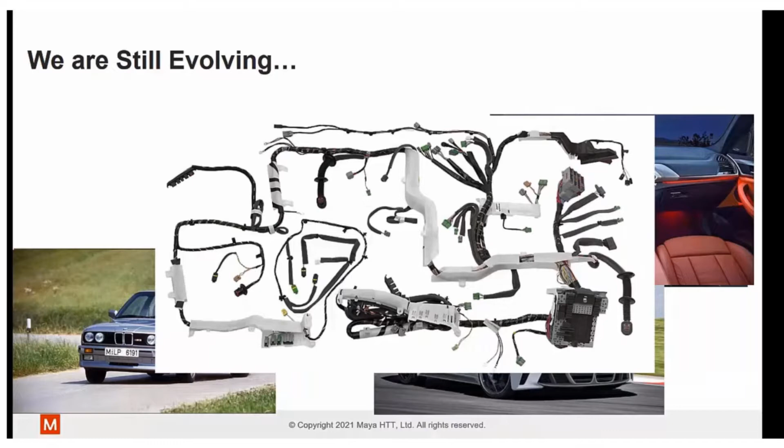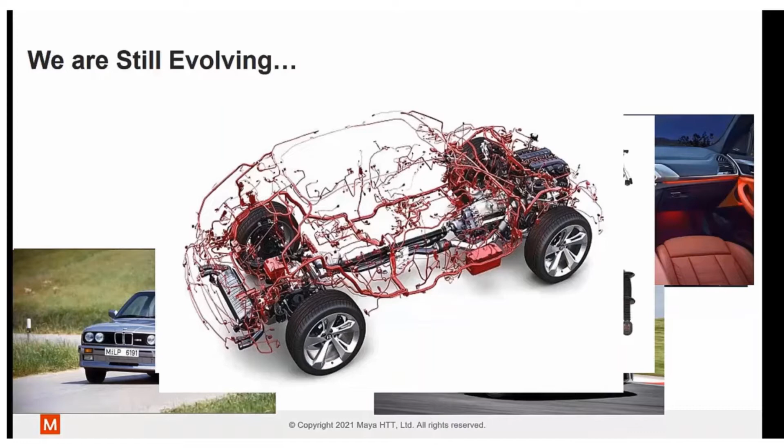Unfortunately, this evolution is a side effect of a common industry trend: electrical content is always increasing, regardless of the industry or application. This increases the cost to do the initial design as well as to manufacture the harness, for example for the prototype, and increases overall design time due to complexity. Every time something new is added to the design, the chance of inducing an error becomes greater, along with changes that you might have to make to the design.

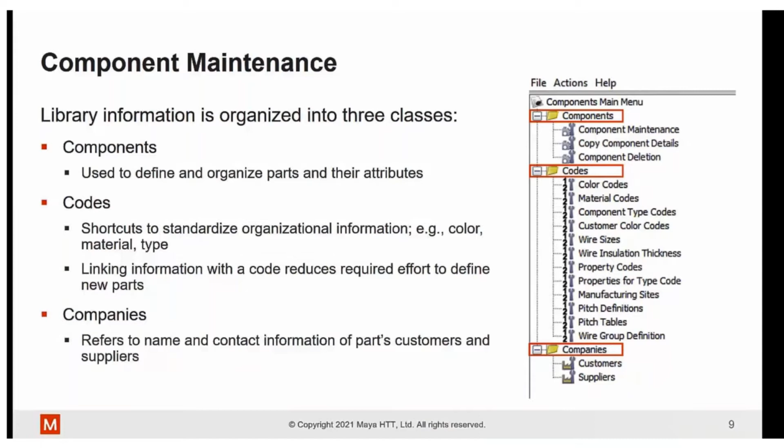Another important part of the Solid Edge wiring and harness database is that it enables users to establish component links, which allows users to streamline time during their design. From our experience, most engineers use non-dedicated tools for electromechanical design, such as Excel or Visio, which don't offer intelligence and are more or less just drawing tools. What sets Solid Edge apart is that it's not just a drawing tool—it's a digital twin of your design, and the digital thread extends all the way from your component database to your design.

For example, let me explain this: you create your own devices, a list of devices in your database. Within those devices, you can associate a group of connectors that are always preferred to be used with a specific device, and each connector could have a group of terminals, seals, and plugs always used with it—these are called cavity components. Each cavity component is assigned to a group of wires. So instead of building each component and device and then selecting connector, terminal, and so on individually, you just select the device, and Solid Edge will automatically fetch all that information from the database into your design. Let's see how that's done in the tool itself.

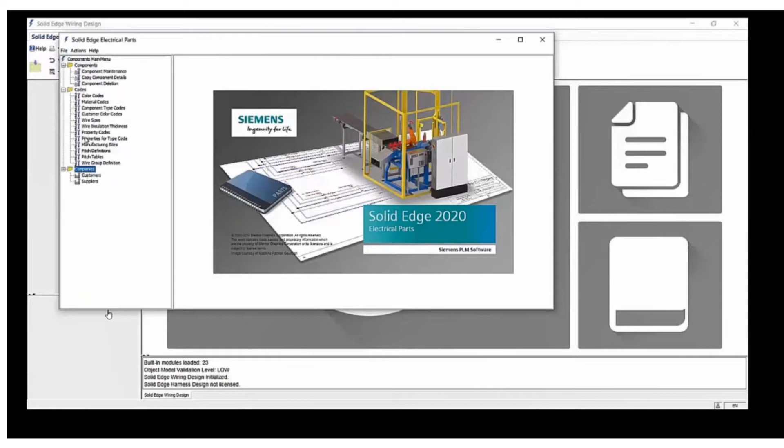The codes are where you define your standards. Once you launch the component maintenance dialog from the components group, we're going to add a new component. We're going to select it to belong to the group connector, and assign a part number for this specific connector. Then we're going to use the user interface to add a description.

So it's just going to be a 5-pin connector. We're going to set the number of pins to 5, and specify using the codes that we defined, the type code, the color code, the material code, which allows you to sort your components and create subcomponents or subgroups within the group itself. So for a connector, you can have multiple types.

Solid Edge also allows you to add the housing components, for example, in a connector, this is where we're going to define our terminals. So here we're assigning a specific terminal to be used with the connector that we just created. It automatically searches the database, and we can search by part number. Once we finalize and set all of the settings for that specific terminal, we apply it, and you can see that it's now listed in the housing page.

Now we're going to do the same thing, but create a device. We established the link between a connector and a terminal; now we're going to establish the link between a device and a connector. So we created a device, assigned a part number, assigned a description for the device, and again leveraged the codes to define the type code, color code, material code, and the number of pins for this specific device.

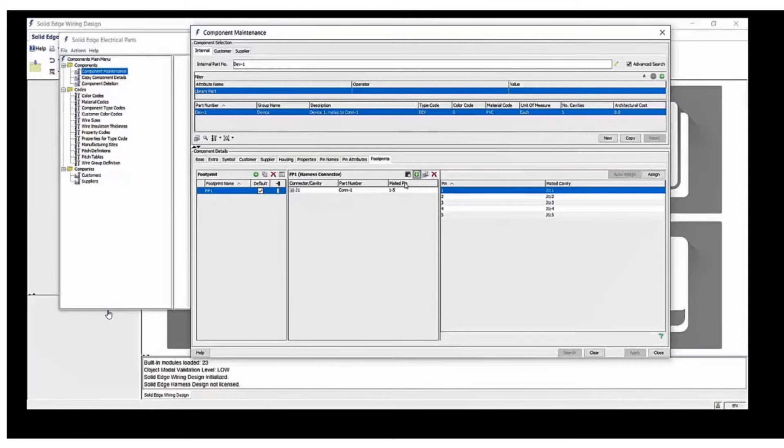Let's take a look at the definitions of the device we just created, or essentially the connector we just assigned. Once we open the definition of that specific connector, you'll notice that in the housing tab, we have our terminal that we just assigned. This is a very smart way to establish links between your components and streamline this in the design. Once you do it once in the library, it's going to save you time in the design itself, since you don't have to manually add those components.

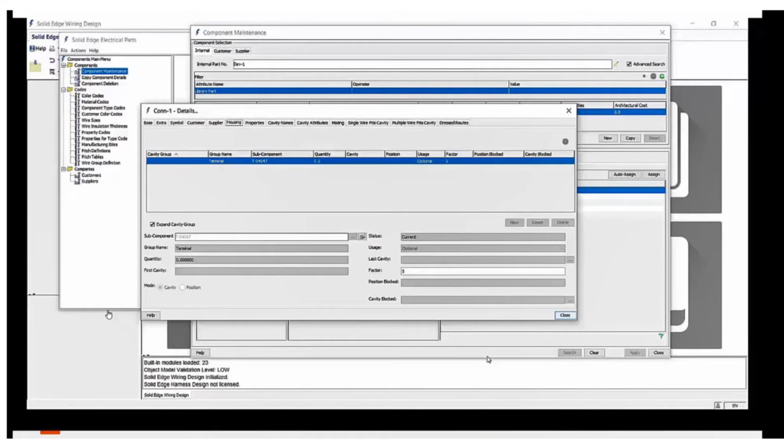So next up, we're going to discuss the design verification. Once you have your first design, you'd like to move into the next stage: verify the design and make sure that everything is operating as intended.

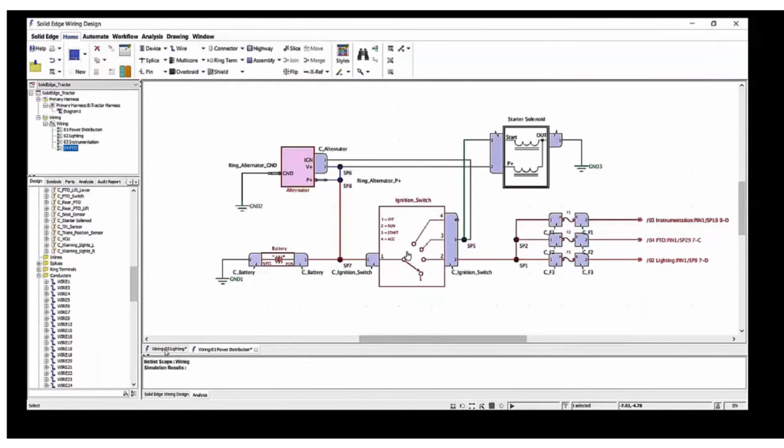Now what we're doing here is activating the analysis mode, and we have two modes of analysis that we'll explain as we progress. We're going to select the qualitative one, which gives us an idea of what's happening, and we can immediately see the diagram moving into a cyan color, indicating there's no current flow. We can select multiple positions for the select switch, and now we can see portions moving into green, telling us there's a current flow in those specific wires. We can simulate faults, and also hover over a connector and select the different positions.

We can go back and see in the main, we can see the power coming from the battery going into the solenoid, but we can see that the light is not going. There's no current to the lighting.

So we can select multiple switches, and now we can see the power is diverted in the instrumentation panel and so on. So we're just testing the different settings, the different positions for the ignition switch, just to understand how it operates.

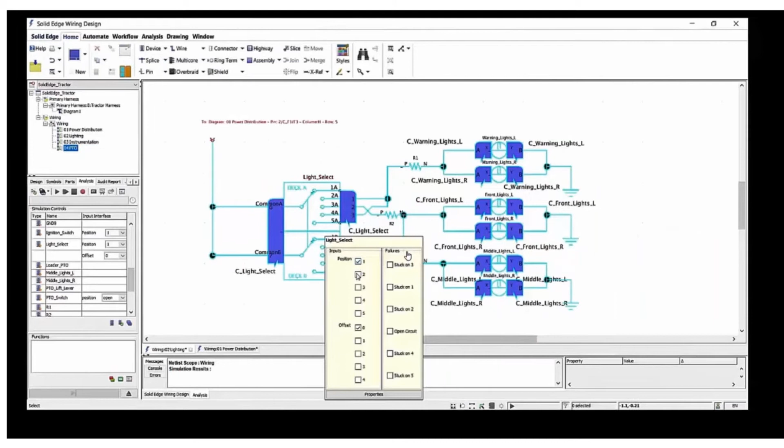And from there, we can go back to the lighting system and select another position for the light select switch. And now we can see the current is flowing. So this gives us an idea of what's happening.

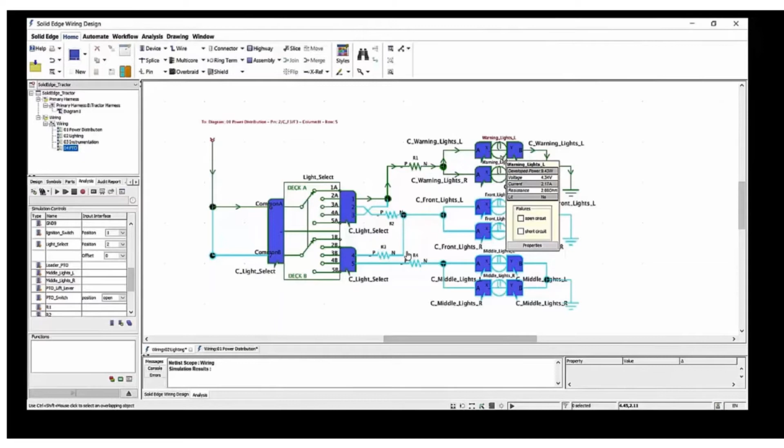Now we're going to move into a more detailed analysis type, which is called the numerical analysis. This allows us to get more information like the current flow in the wires, the rated current of the wire, the voltage drop in the wire, the resistance of the wire, the temperature of the wire. All this information is available from the definitions that you have in the library database. So Solid Edge wiring and harness utilizes this data to show you quickly what's happening.

And we can also simulate things like short circuit and failures in our systems. Just as you hover over the specific component that you'd like to know more information about, it gives you a list of such information.

Again, here we go back to the main challenge of the electromechanical design in the industry, which is ECAD and MCAD collaboration. The nature of the engineering process is a multidisciplinary process where multiple engineers and technicians are working on the design, and therefore being able to exchange the data between all teams involved is of the utmost importance for a better, quicker, and less risky design.

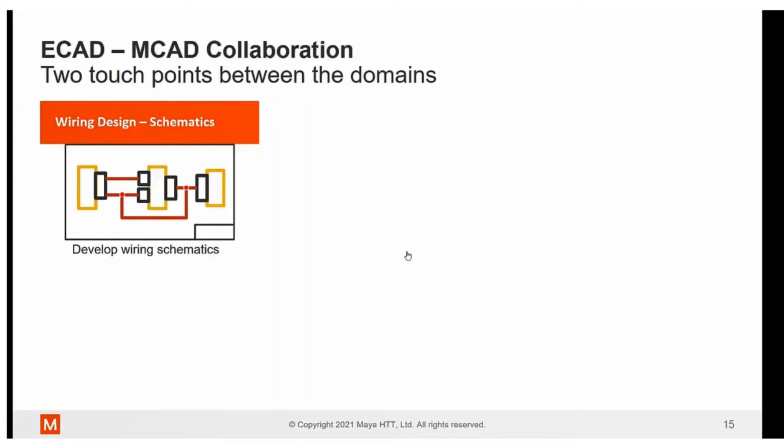So the ECAD and MCAD collaboration, when we break it down into three main sections: we have the wiring design, where you develop your schematics, usually done by the electrical team or electrical engineers. Then we move into the actual 3D CAD electrical routing or 3D CAD modeling, which depicts the actual physical length of the model, whether you're designing an electric vehicle or even a coffee machine. You have to have some physical representation of that specific device.

And again, the harness design, which is called a nail board, to actually manufacture the schematics that you just developed for those components. So let's see how Solid Edge wiring and harness and the different IES portfolio, the integrated electrical system portfolio, address such challenges of ECAD and MCAD.

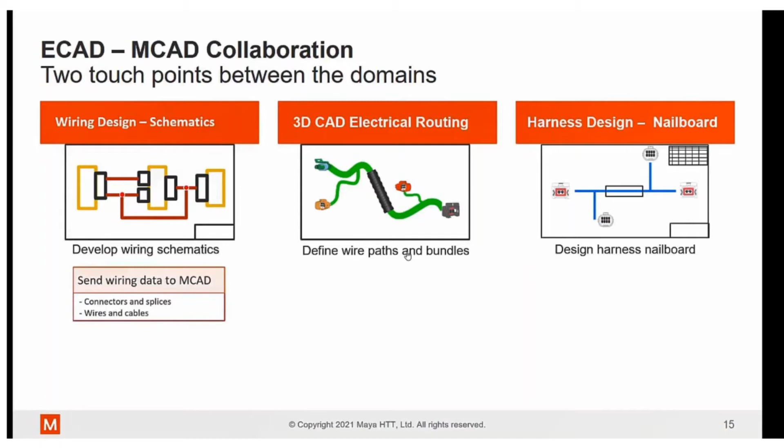The first step, we're going to use the wiring design to send the wiring components, for example, the schematics, into the 3D world. Then the mechanical team usually imports this data to calculate the wire length, to calculate the actual distances between and the positioning of those different components in the actual physical diagram or the actual physical model.

And that data is sent back to the electrical team to use those wire lengths to calculate voltage drops if the device, if the application, is sensitive to voltage drops, for example. So this process is repetitive until you finalize the design and reach the point where you have confidence in and achieve exactly what you're looking for in terms of your design.

So let's take a look at how that looks like. In this case, we have an integration between VeSys, which is a tool in the IES portfolio, and Solid Edge and NX. Solid Edge wiring and harness has the same integration with Solid Edge, the CAD model, of course.

So what we're doing here, essentially, on the left we have the schematics, and on the right-hand side we have our harness. As you can see, the physical representation. We quickly import the information into NX.

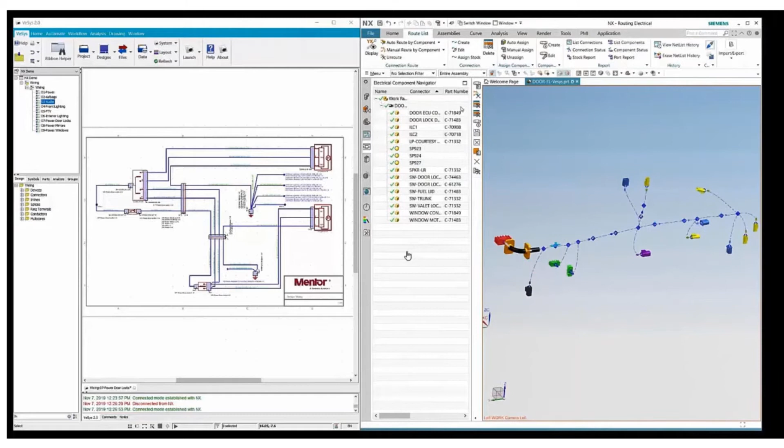And from there, we're going to assign the components. The components that are known and identified are assigned automatically. Components that have the same part number, we need to assign them manually. For example, splices — we're using the same type of splice for this specific application. That's why the manual assignment. But you can see the connections are identified automatically.

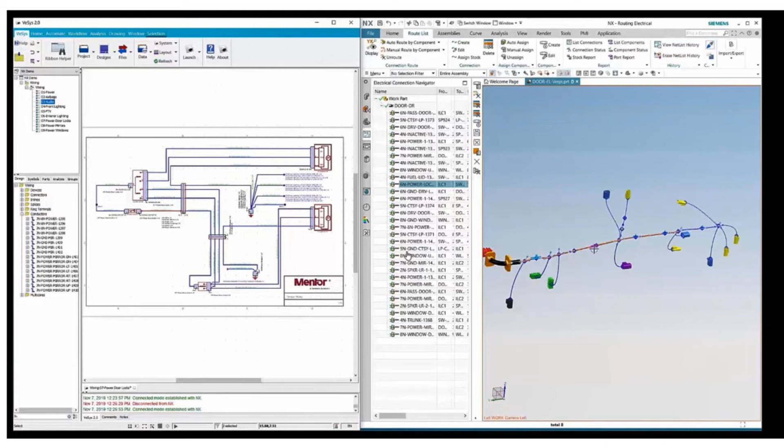And a very powerful feature is that it allows us to cross-select. So as the electrical engineers and the mechanical engineers are selecting different components, it highlights on each other's screen. So the mechanical team can select a component and it highlights in the electrical, in VeSys, for example, in this application, and you can see how it cross-highlights automatically in the other screen as well.

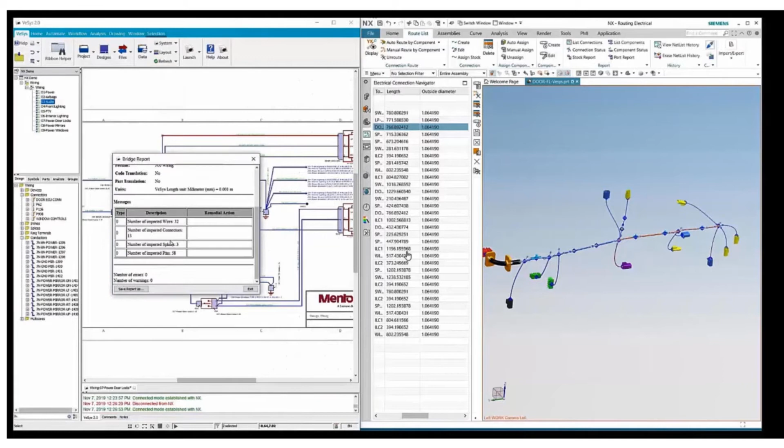Another thing is exchanging wire length. We can see that this wire has no length, but if we select the same wire in the actual representation, we can see the wire length. So we're going to exchange the data between the two softwares, and with a click of a button, now we have the wire length information inside the tool, which allows us to do a detailed analysis and calculate the voltage drops. The final step after that is to send the finalized CAD model to produce the harness, or the actual nail board or form board, depending on how you'd like to name it.

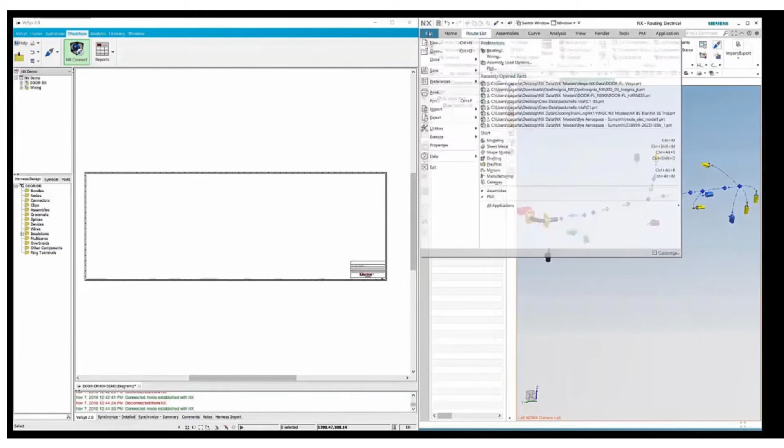So again, let's see how that looks. We have our components in NX with the components assigned and defined, and we're going to establish the connection mode between the two. As you can see, we don't have any connections yet because this information we're going to bring into the electrical tool. We're going to make sure it's using the correct format to interface, which is PLM XML. Once the mode is established, we're going to import the harness.

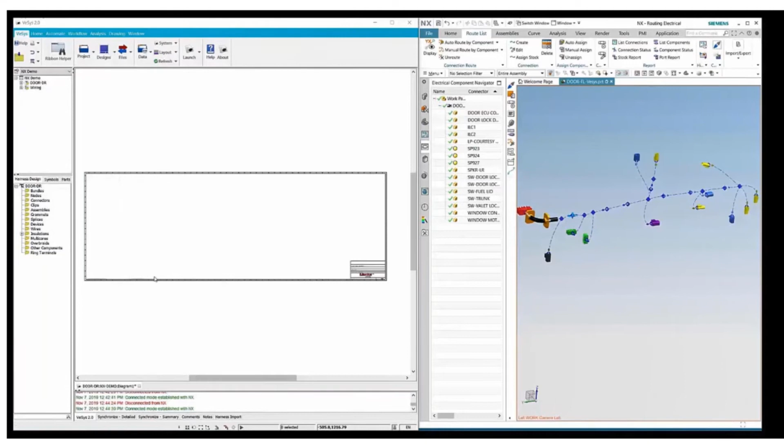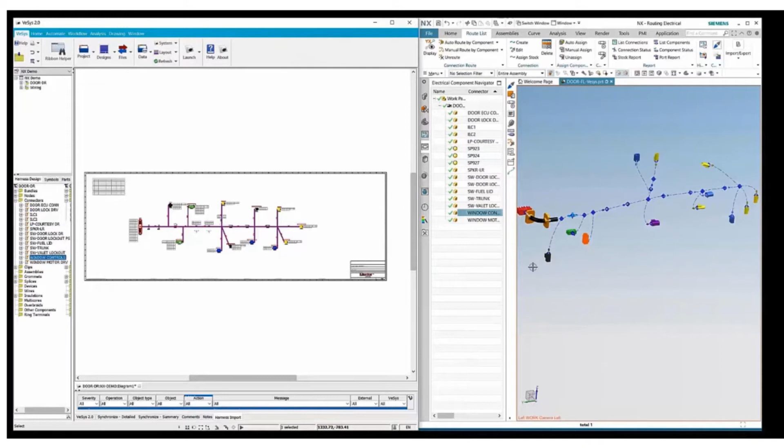The tool immediately asks you for the type of flattening required. In this case, we're going to use 2D flattening, just selecting that. And it's done—we have our harness imported automatically into the tool. Cross selection is available; once we select, it highlights in both screens. This is a very powerful tool. It saves time in the design and even in exchanging data between different tools or different teams in the design itself.

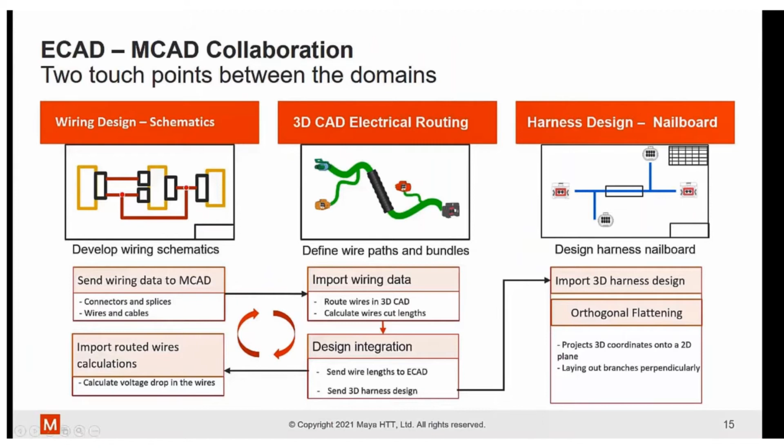Now we've looked at the ECAD-MCAD. Now let's look at the automation functionalities available in Solid Edge wiring and harness.

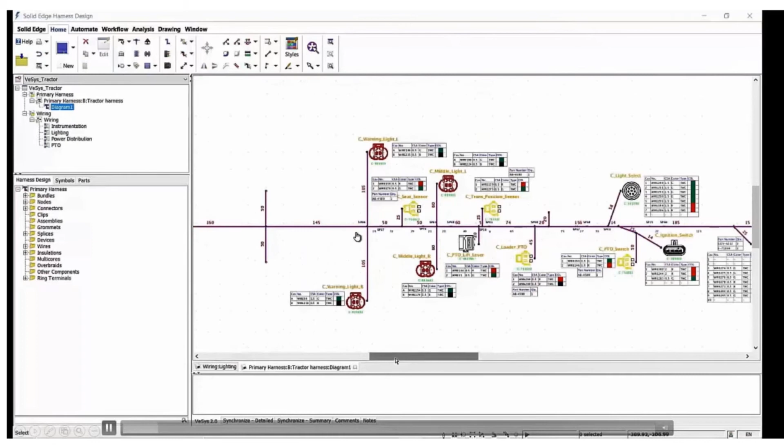In this case, we're going to make sure we add more components to our wiring design. Here at the bottom, this is our harness, and as you can see, it's partially completed—it's missing a few components which we added in the wiring. Now we just need to assign them to this harness and synchronize the information so we can bring everything over from the wiring to the harness.

So going back to the wiring design, we're going to make sure that the components here at the lower part of the diagram have a specific description, which is the name of the harness we're designing—the primary harness in this case. We're just going to make sure all the components have that specific property set.

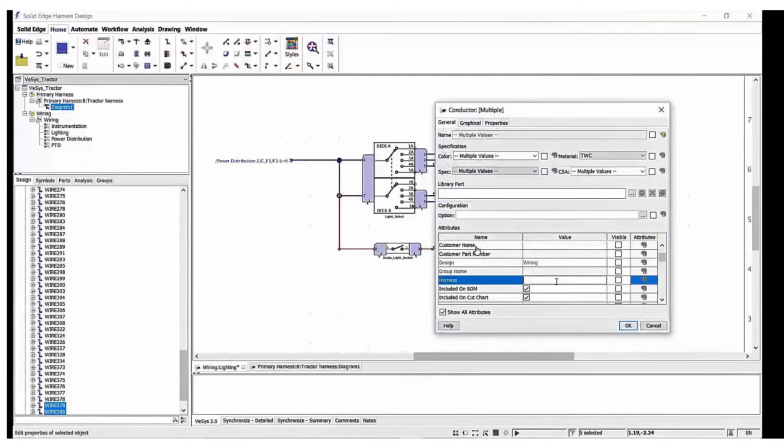And we're going to do the same thing for wires, connectors, and devices, just to make sure everything goes directly into that specific harness. Once that's done, we're going to save the project, close the wiring, and synchronize the two. This is going to bring over all the information we just added to the wiring, automatically, to the harness, so we don't have to start from scratch.

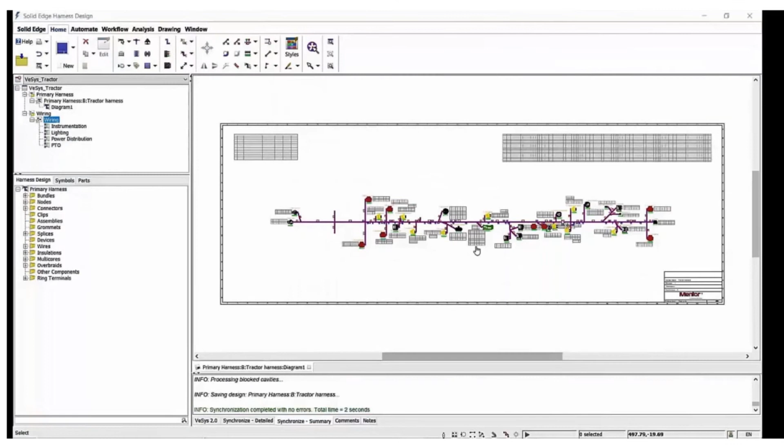And as we zoom in, you can see the new connectors, components, and splices have been added to the harness. All we have to do now is move them out of the way and manually place them in the locations that we want.

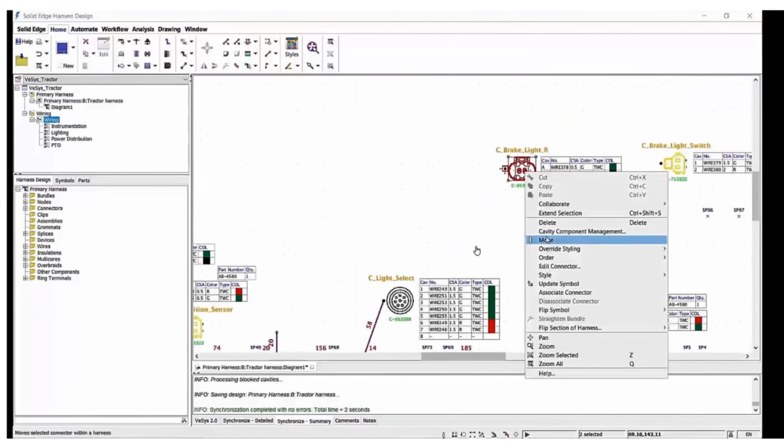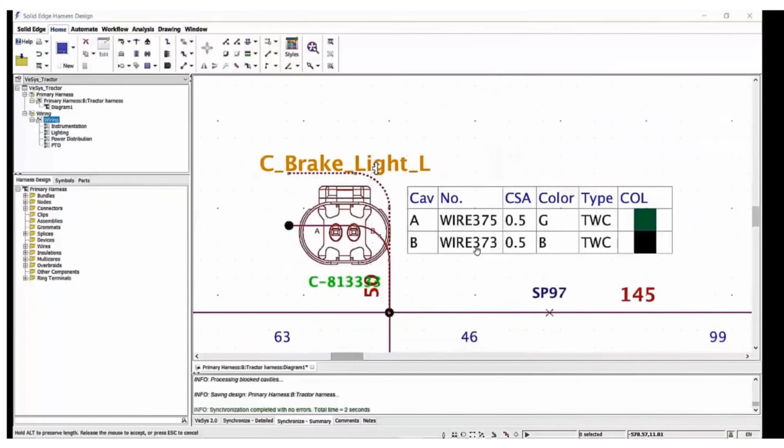Once that's done, we're going to start placing them in the locations we want in the harness. We're also going to specify the nodal positions of the splices, and we're going to use Solid Edge Wiring Harness native harness manipulation tools to quickly and on the fly organize our harness into a better view, just to make things a little better that adheres to a company standard.

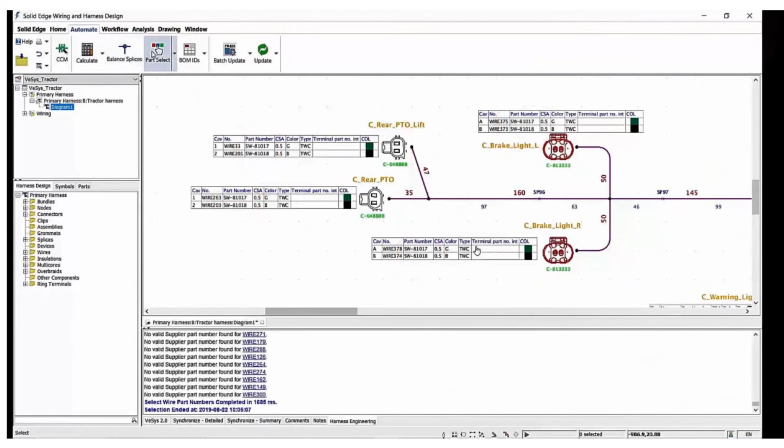If you have a standard for the minimum bends and so on, you can also optimize, and use automations, for example here, to apply the styles. So we're going to look at assigning part numbers, which is an automation based on the properties we assign. Just with a click of a button, we selected the part numbers for all our wires based on the information we provided, or that we brought over from the wiring harness.

We're going to do the same thing for the wire length. We're going to let Solid Edge Wiring and Harness automatically calculate wire lengths for us. Again, just with the automation, we can use the auto calculation of wire length.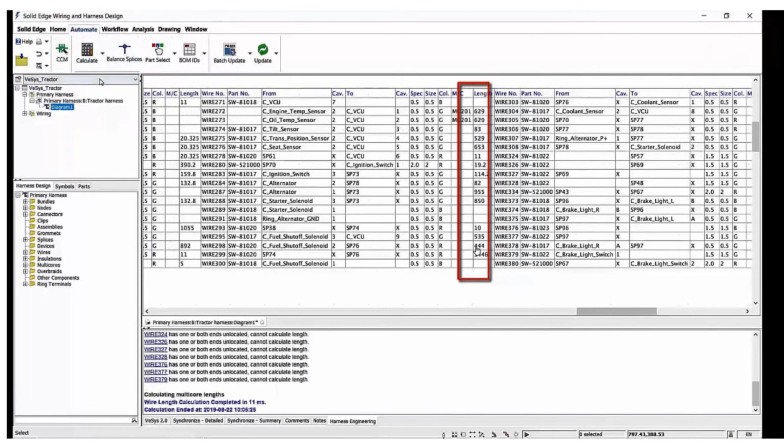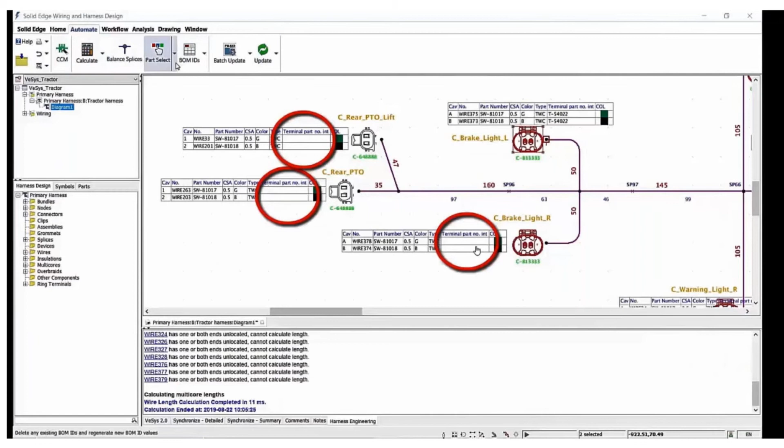For cavity components, we have the option of assigning them manually, component by component. For example, in this case we're assigning to this connector, which is the brake light on the left-hand side, and you can see the terminal brought over and the table populated. Or we can assign it to all components at the same time, using the cavity components and leveraging the definitions we assigned in the component database.

So this is how the digital thread continues from your data library, from your library database, all the way to your design, whether in harness and in wiring.

Now the last part is to highlight the reporting. Reporting is extremely important because we need to think about how much time you spend designing documents, such as the bill of material, the wire list, and part list. And how do you share these documents with your customers, your OEMs, your team members, and how do you exchange this data? So let's jump back into Solid Edge and see the reporting functionality together.

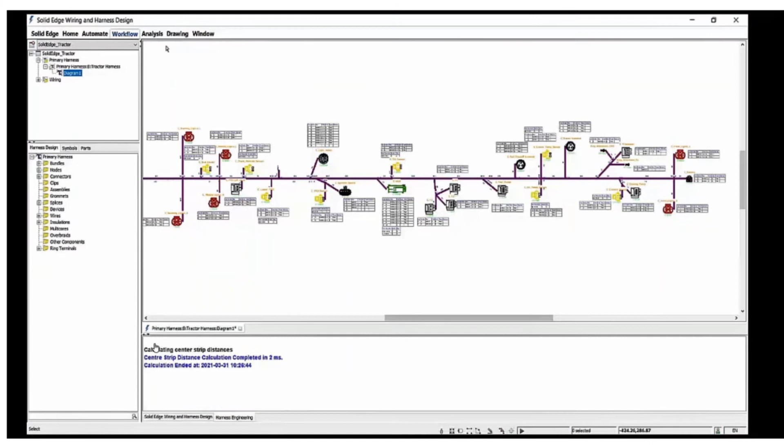We're going to use the exact same design, just finishing the design. From the workflow tab in Solid Edge Wiring and Harness, we have the reports. You have either built-in reports or you can build your own reports. Let's see the reports that are already existing in Solid Edge Wiring and Harness.

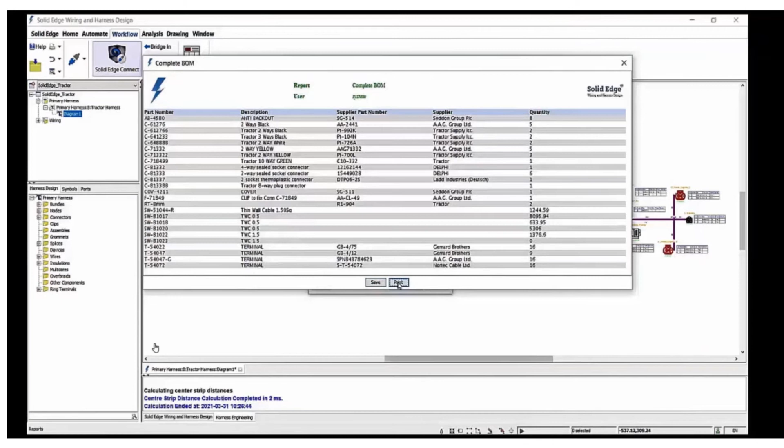For example, the complete bill of material, which you can generate on the fly. You have a list of all the components, the description, part numbers, supplier part numbers, and the quantity of those components. You can save the report, print it directly, or even send it to your colleague. You can also see the separate bill of material, which breaks things down based on the groups that you define in the database: connectors, terminals, wires, and so on. Again, all of this is on the fly in Solid Edge Wiring and Harness. It doesn't need any additional licensing or extra cost.

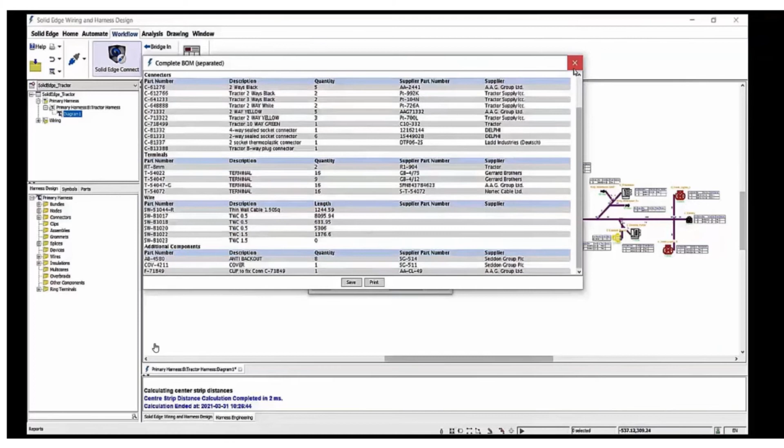The same thing again for the wire list, where you have the specs, the name of all the wires, where it's coming from, connecting to which component, which cavity, which device, which pin. Again, all those reports are on the fly.

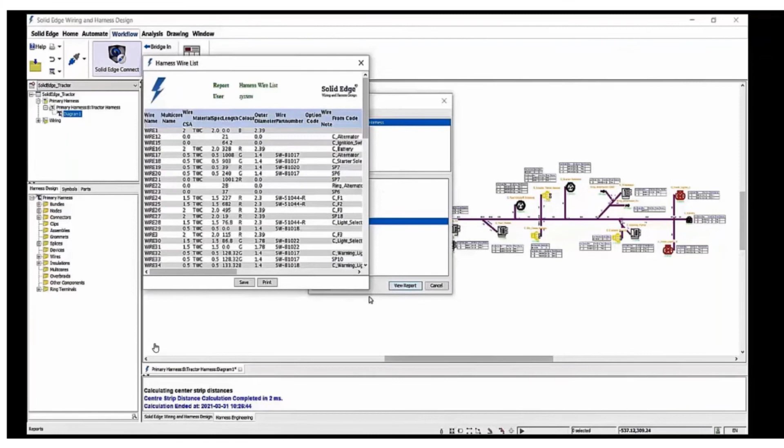Here we're looking at the harness wire list. It's just a more detailed list of the wires, all the connectors, the colors, the length, the part numbers of the wires, and all the terminals connected to.

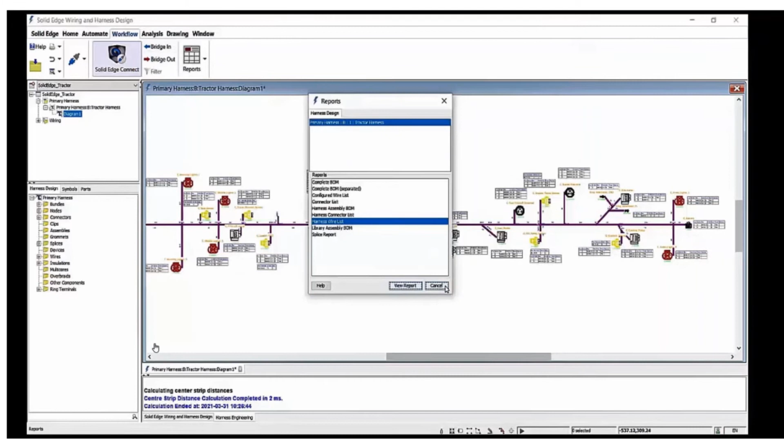The other thing we can do is build our own reports. For example, here we would like to build a very simple report from two components. We just want to take a look at the wires and generate a report that tells us each wire is going from which component to which component. We can include other categories or groups of components as well if you'd like.

So first, we're going to assign the name of the wire and change it to wire. You can select from different types, so we're going to wires, and we have a list of all the wire names. Then we're going to set this from an attribute, where we want the wire part number to be added to the report. For example, going to the common tab and then assigning the wire part number. As you can see, all the wires that have part numbers assigned are automatically imported into the report.

Now we're going to add two more columns. One is going to be 'from,' where we can control whether it's the component name or the component pin, and we have the selection to do it. We're going to use the component name, and as you can see, a list automatically populates.

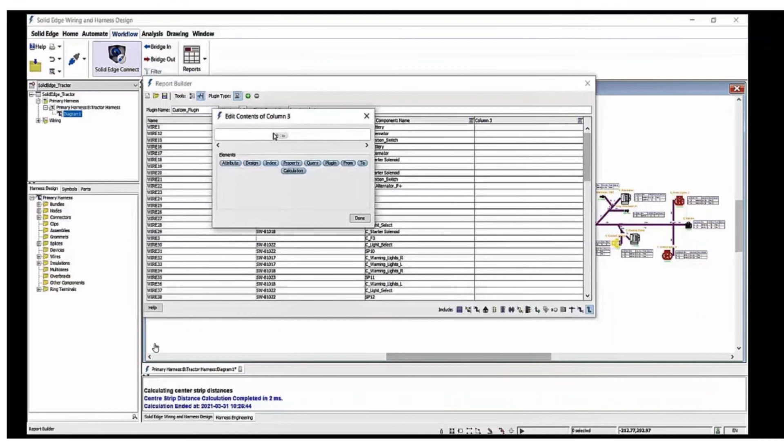For column number 3, we're going to assign the second attribute. From component, we need to specify the specific cavity in that component. As you can see, all the wires going to those components have been filtered out.

The last thing we're going to do is assign a function for which component this wire goes to, and add another column that tells us the cavity of the component. So we've created a report that tells us the wire name, the part number of the wire, where it's coming from, the component, the pin, which component it's going to, and the pin that it terminates in on the other component.

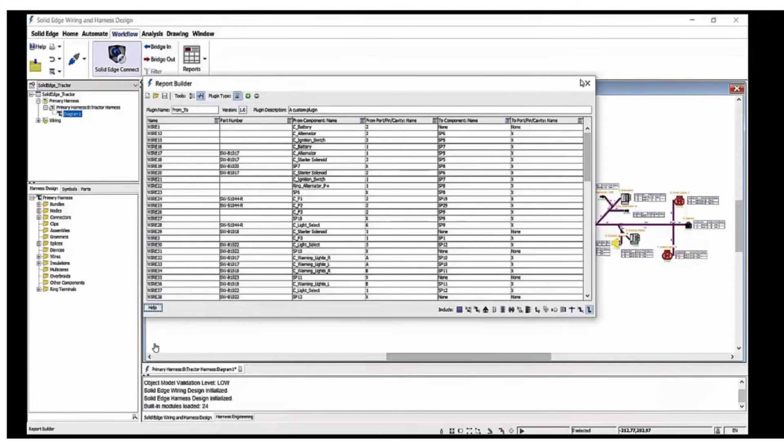Once we generated the report, we can customize the name and give it a description—in this case, we're just going to call it 'from to.' Once that's done, we're going to save the report, and now let's see how we can generate our report in Solid Edge Wiring and Harness by simply going to the reports, where it will be listed among the predefined reports as 'from to.'

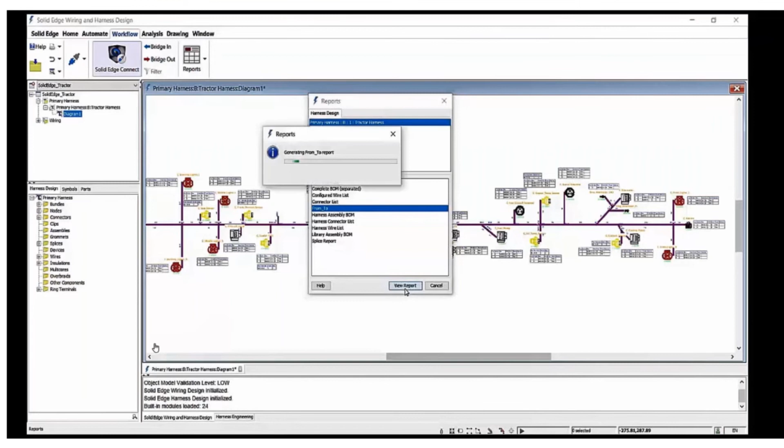Then simply view report. You can share it with your customers, or save it directly. It's very easy to create your own reports if the predefined reports don't exactly agree with your company standards.

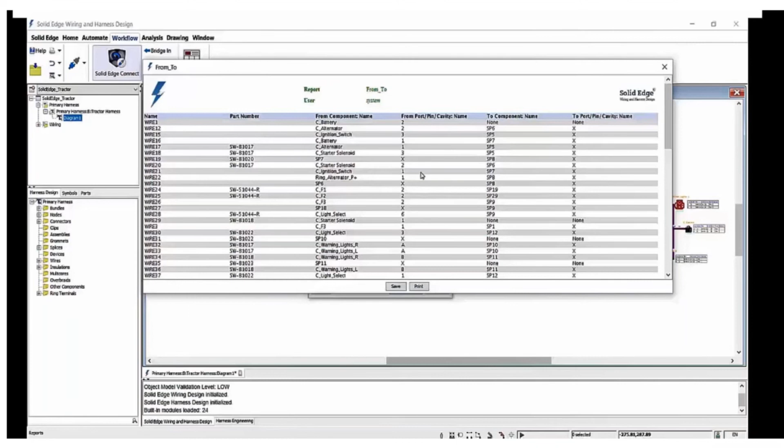So it's a very useful tool that helps us address the challenges of the complexities we find as a result of evolution. Let's see exactly where we encounter such challenges, in which industries, just to be more specific.

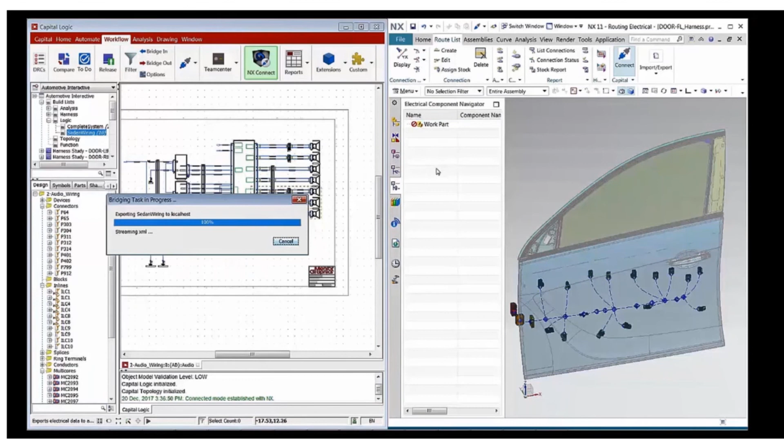In the automotive and transportation industry, we find many applications for such evolutions, where we can exchange ECAD and MCAD information. For example, here we're designing a harness for a sound system on the door. You have the inlines that break between the door and the body of the car, the different connectors going from mirror control to window control to locking the doors, and how we can exchange and assign those components. Cross selection is always available if you'd like. That was an example from the automotive and transportation industry.

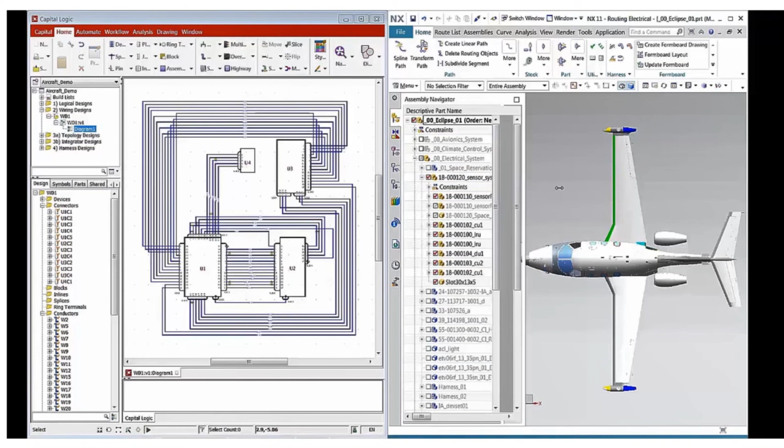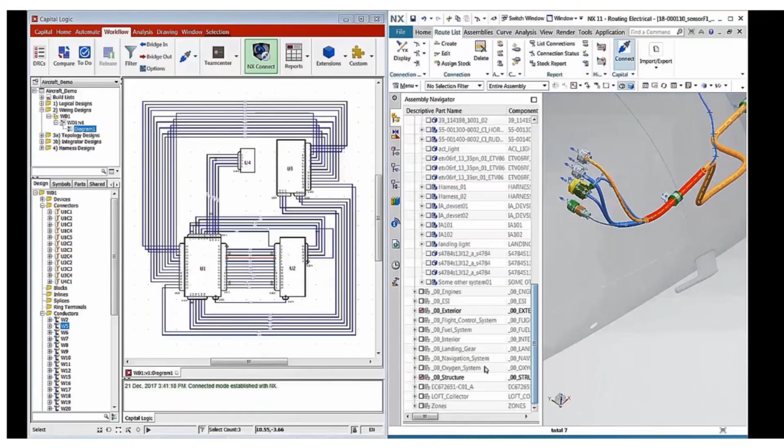Let's take a look at another example from the aerospace and defense area. Again, regardless of the complexity of the model, you have your electrical representation and physical representation in the actual model, and you can connect that with your electrical team, assign your components and connections, and see everything brought over automatically. Again, you can cross select. This allows you to communicate data between different designs and different teams at the same time, and you can see all this information generated just from the database you provided in the application. It's a very powerful feature to use and leverage.

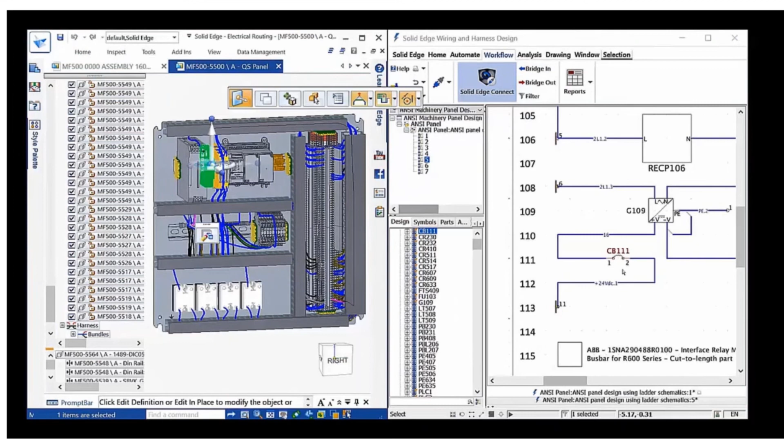Another example of the same challenge is in the electronics industry. For example, here we can see Solid Edge Wiring and Harness working with Solid Edge, the same application. We're doing cross selection, and you can see how it highlights in Solid Edge Wiring and Harness, and how it highlights in Solid Edge. So what we're doing is trying to synchronize the data bit for this specific control panel.

The applications go on and on across all different types of industries - the marine industry, heavy equipment or industrial machinery, or even the medical industries. So the complexity that comes as a result of this evolution, we can witness in virtually all industries.

The electrical content is always increasing, regardless of the industry or application. This increases the cost of the initial design and increases overall design time and complexity. Similarly, every time you make a change to the design, there's a risk associated with that change. So Solid Edge Wiring and Harness addresses those challenges by allowing the user to automate the design workflow, collaborate across different multidisciplinary teams and departments, and reduce your design risk and design cycles, essentially verifying your design to ensure the least amount of risk possible.